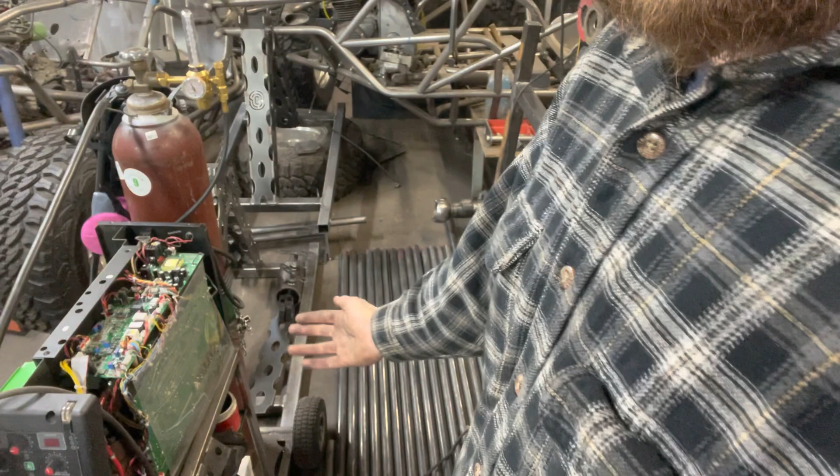But today we're gonna be also working with a broken Everlast welder. They're sending me parts. It's part of the warranty and everything. Great machine. It's put in work, but the fan took a shit. They noted it when I got it in the order that it was acting up, but is what it is. They're sending me a new one. I'll get it fixed up hopefully this week.

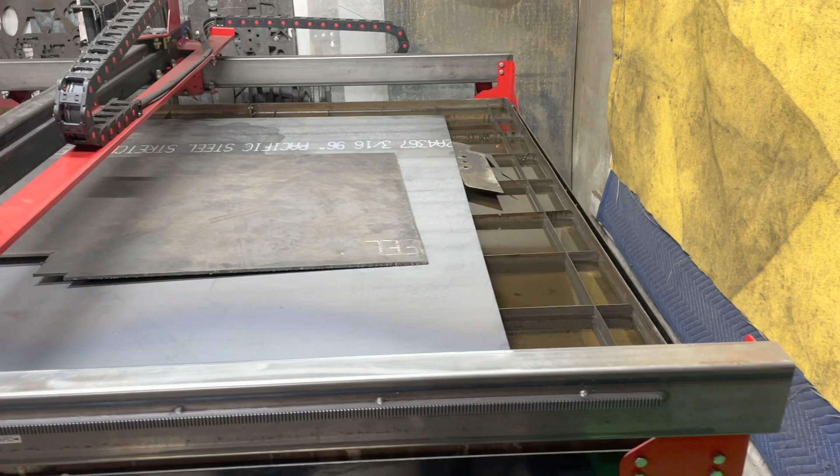We have not dialed it in anymore on this, but this is 3/4 inch, and look at that clean, nice cut. Like I said, that's our first cut. We have not cut any more 3/4 inch, but we just wanted to see if we were able to. Jibber jabber, let's show you the project that we got, this here pickup.

It is one mean looking unit. Toyota 8-inch mini axles. The 8-inch pod size. This does have an aftermarket axle. I believe it is a Diamond housing. I could be wrong. There's a lot of fabricated housings out there now. It doesn't look like it's Trail Gear, but obviously everyone, I'm sure they'll post in the comments and figure out what it is.

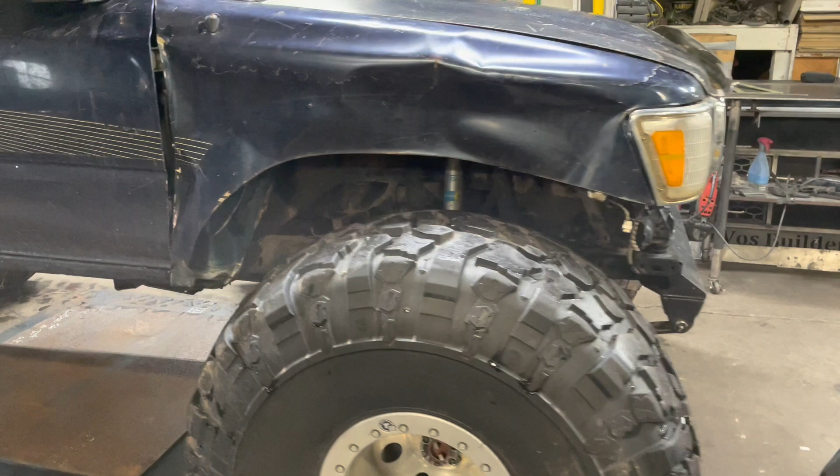But here is, this isn't exactly, but this is where the WFL Walker Fab Lab front hanger extension kit came from. Basically, we do this around our area, and I figured, since I have the capabilities, I'll make a kit for everyone else so they can move their axles farther forward and clear 42s and not have to worry. This one I didn't do. I'd prefer the axle to be a little bit farther forward with a little bit different setup of springs, but different strokes for different folks. But it's a clean rig, and let's get this build going.

So first thing that we're going to do is we're going to assess the rig and see what kind of design layout that we can roughly do on this. Some people cut their fenders too much. Some people cut their fenders not enough, or some people don't cut them at all. This one actually happens to be just about right. So now we can manipulate it the way we want it.

And I know I got a few words that I say consistently, so sorry. You're just going to have to work with me.

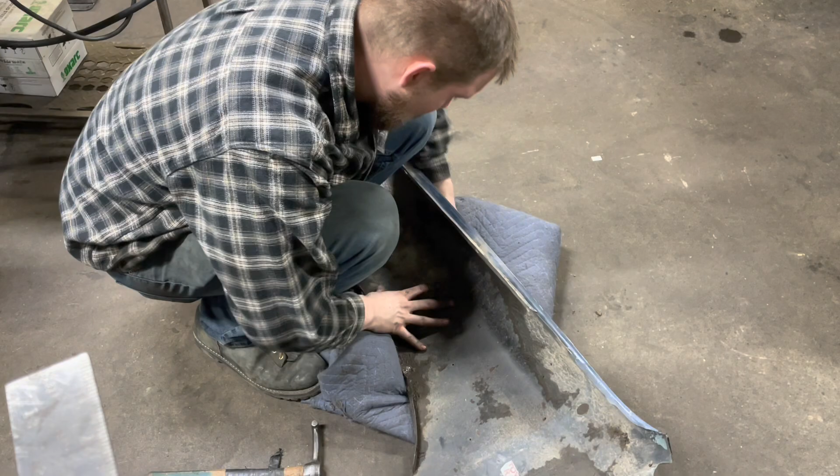But this is the rig we're working with, and I'm going to start measuring and getting some tubes bent up, and you'll watch me get those prepped. Alright, so this fender is really beat up. I'm going to try and straighten it out a little bit so it just looks a little better. I like everything just a bit better.

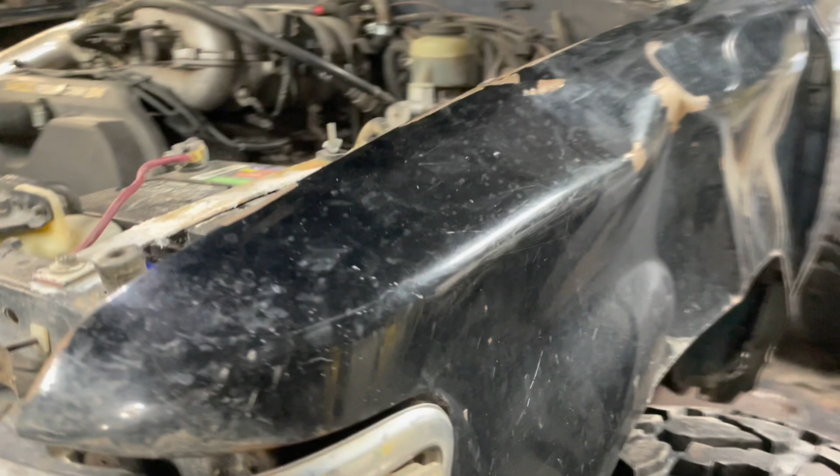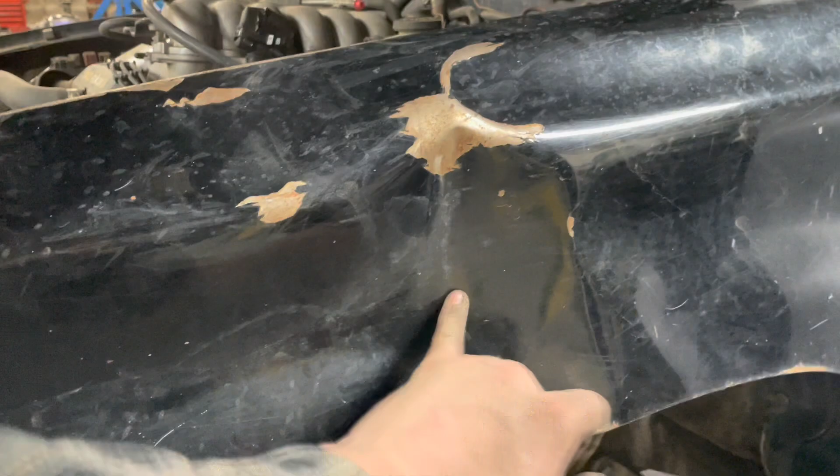Let's see what we got to work with. So, okay, so this side's a little bit more beat. So you can see this. All right, let's get this worked out first. This one, this is the main. It's almost a certain shape. And then we'll work on this one, okay? Because that looks like it'll fan out once I'm done. And then after we get this crease worked out from this one, we'll then work on this one.

I don't know if you can see that, but it's just a slight little crease. It's like it all just bulged out in a way. I don't know. We'll get it figured out and make it natural looking, but the rest of the fender's not too bad. We'll work this and fill this gap so that it looks just cleaner, because our continuous A-pillar, sorry, let me get you adjusted. Our continuous A-pillar is going to come down and then drop down.

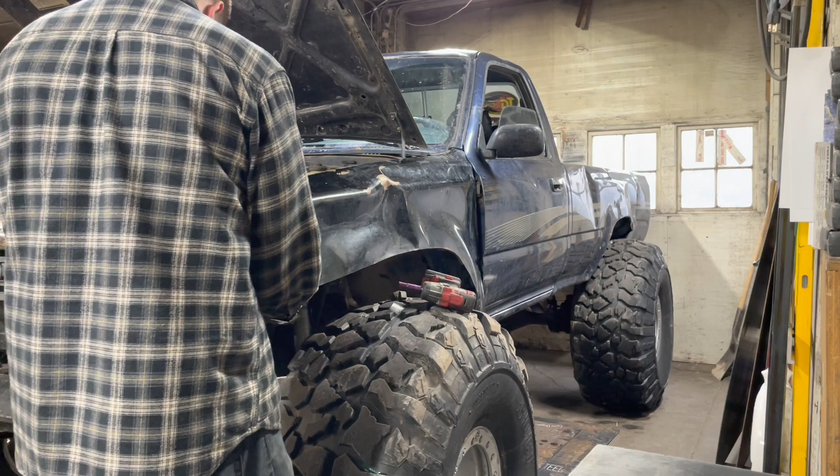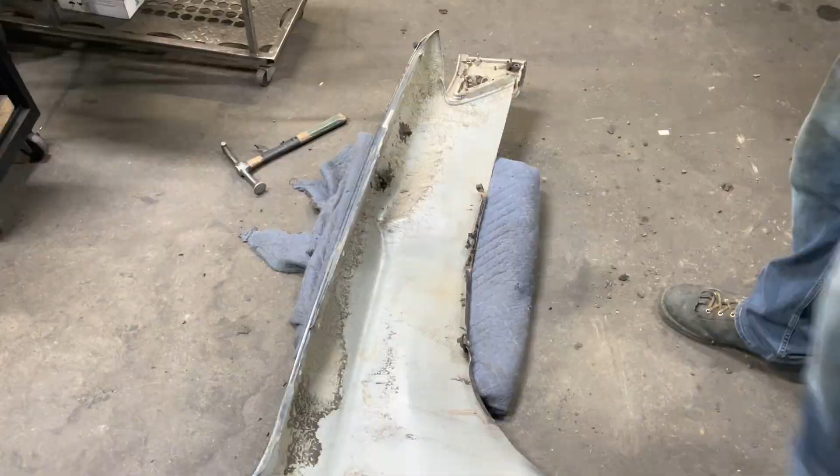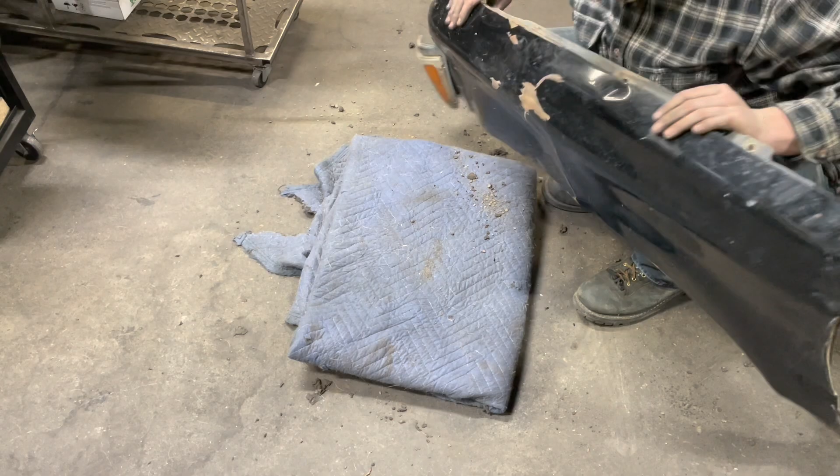We got our makeshift pad basically here, and we're going to work out this one first, then we'll do this one and then this one. So, let's get this going. There's that little piece worked out already. Paint chip and fade is going to happen on here. That's a given. Just trying to make it a little nicer. Blanket pad.

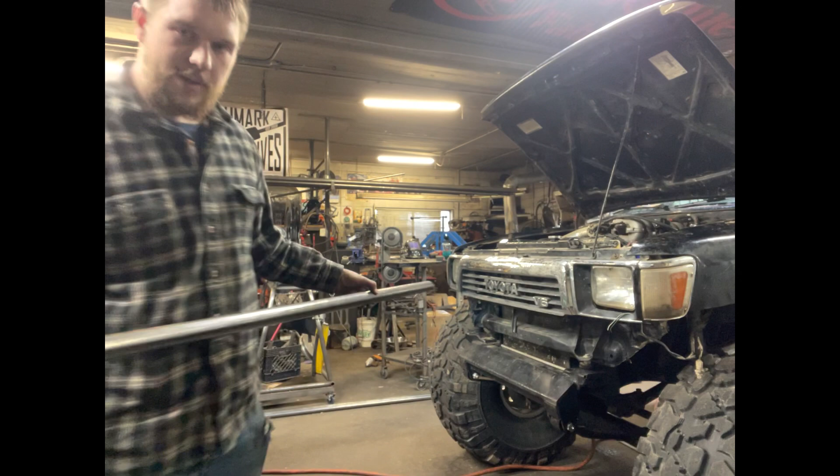All right, so we got the tubes cut. They're right here on the table, just out of sight of camera. I got these caps, all right? And I basically got it so dialed I can put the cap in, smack it in there, and it sets itself in there. Now I'm gonna TIG weld these up, okay? And you're gonna see that right now. So we're getting this cut right now.

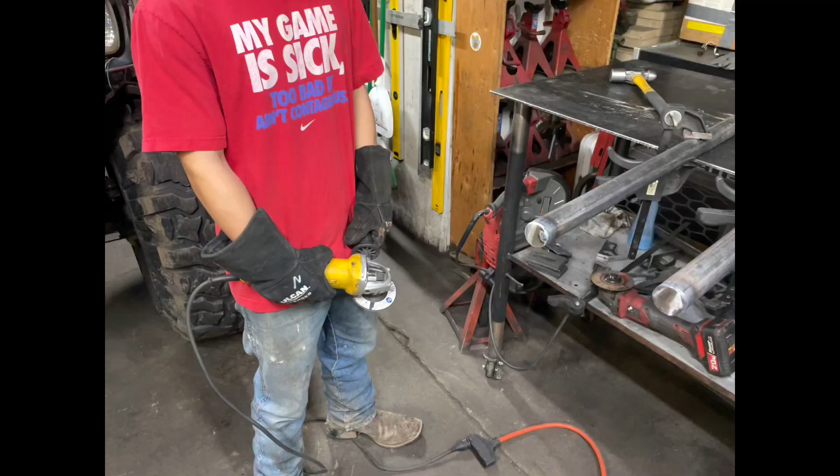So the shop hand had a question, and we had a low spot right here, and he didn't know what to do, right? He was texturing this tube, you know, stage 1 of texture. So he asked what he should do. Should he grind it more on this side? And I was like, well, that's usually option 1. So we tried it. He grinded a little bit, right?

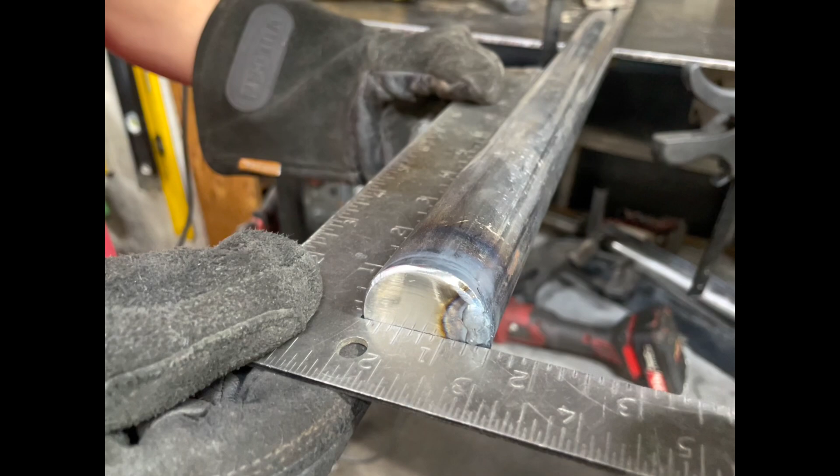And we kept checking it with a square, like he does, and it wasn't square right off the bat. Now it is square about now, but it wasn't square at the time. So I was like, all right, well, grind down to a happy medium on this side, but make sure we don't, you know, blow through and show the cap.

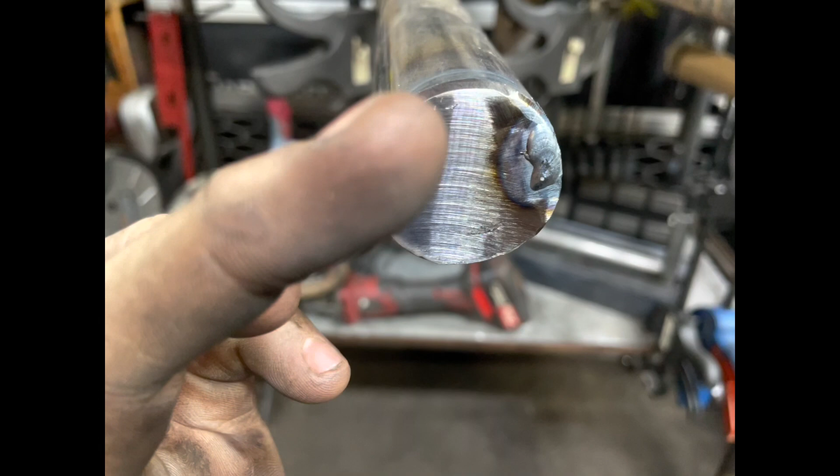So once he ground down, we cleaned it up just a little bit. Nope, it's not. It's just reflection. Ground it down a little bit, and then I TIG welded the little low spot so he can then grind down flush that little low spot on this corner.

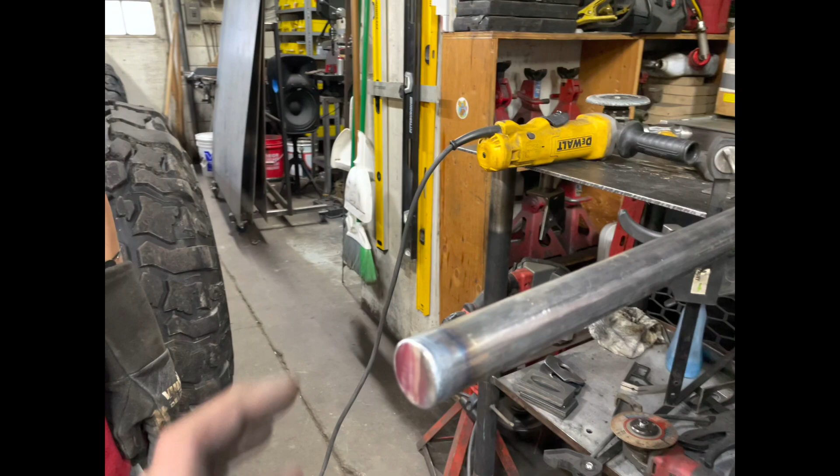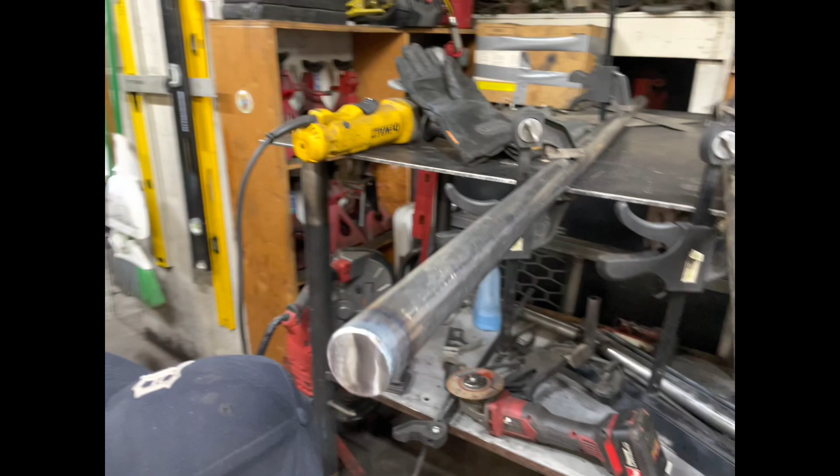So as you can see, he got it cleaned up in that little bit of time. And now this is step 1 of the process. As you can see, we got our little profile on our edge, which is, say, I don't know, a 30-degree profile, little bevel all the way around that. And now he's going to get the sander out, and we're going to sand these to shape.

Now we always start with the face, get that sanded, make it all look pretty, and then we start with the whole outside perimeter. The last part is the bevel. You always worry about the bevel last.

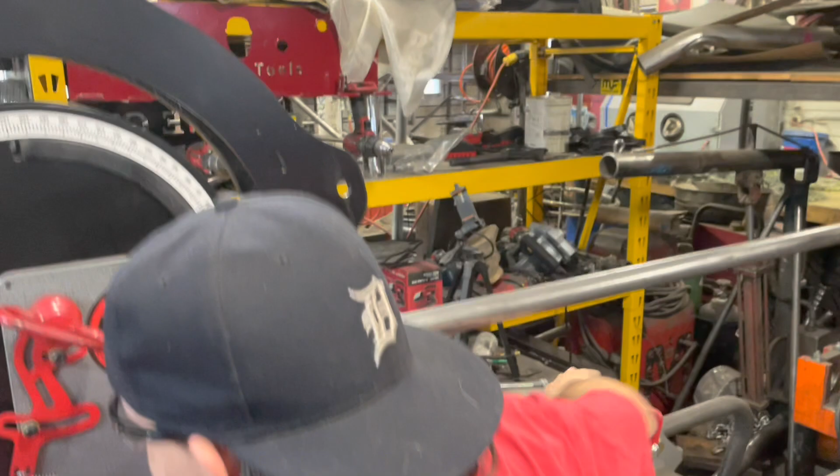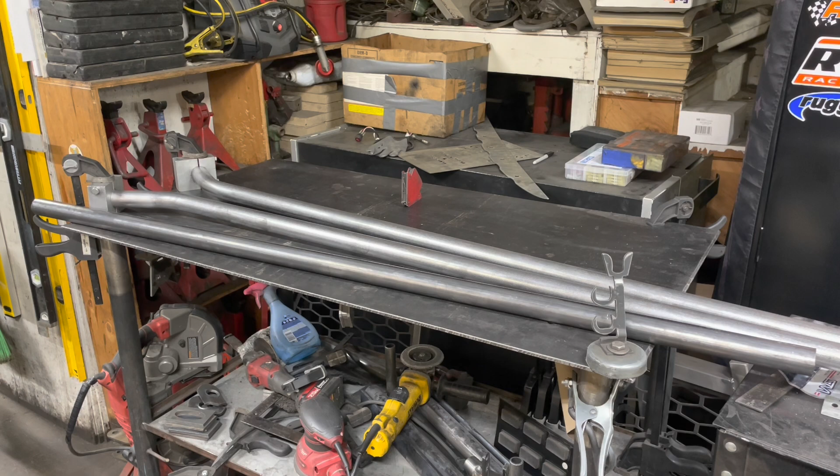And that's how you load her up. Okay, so we got our tubes for the start of our rock sliders here. I'm going to show you how we are going to do these rock sliders today. We're going to get our first clamp block in position. We'll take it over to the bender, let it bend all the way to the degree needed.

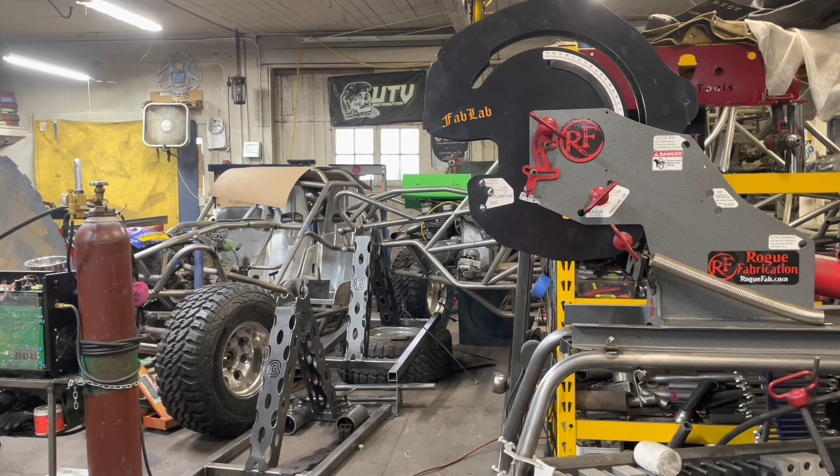To the video. Stop it. Yep. Okay, go.

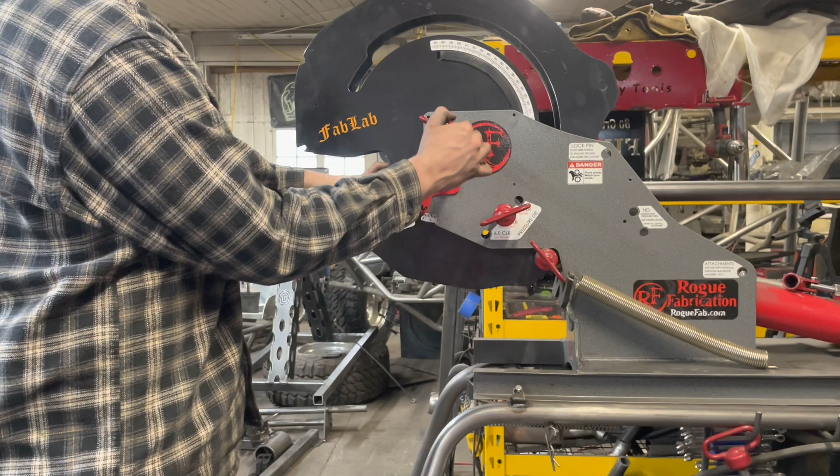So loading the Rogue Fab M600X HD, as it used to be called before they upgraded the machines, can be kind of a booger for some people. You want to find the hole that you're using your die in. So this is a 4.5-inch centerline radius die. You're going to put it in a 4.5-inch centerline radius hole.

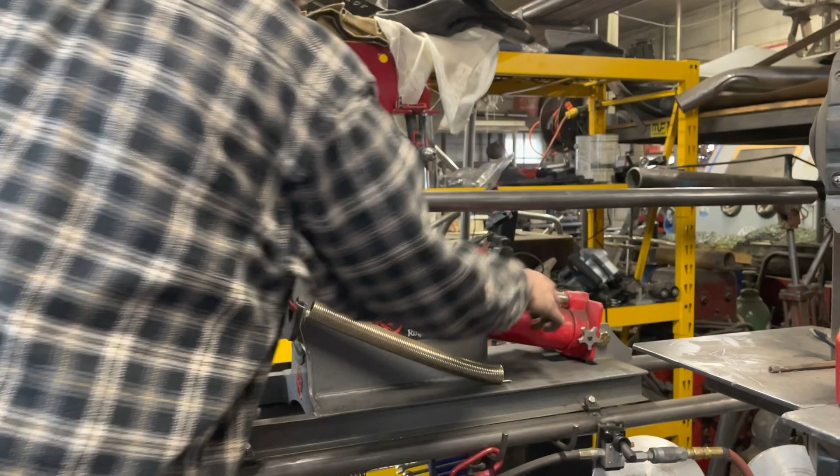Now when you do that, you'll need to pull your machine down because there will be pressure from the ram sometimes. Take your middle finger, pull the back plate, your thumb, and push the pin. Close your valve, and you pump it just barely snug. Not cranking on it with the lever, just snug. And then that is your zero. If you do that every time, you will have a consistent 0-degree mark.

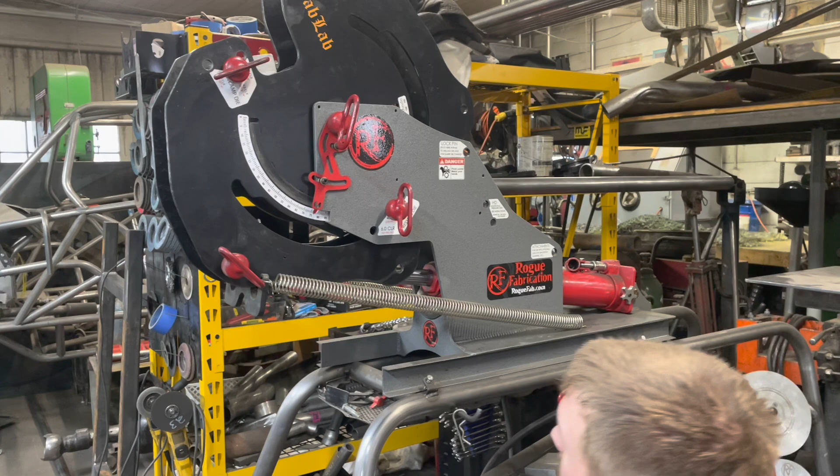So we're going to be taking this bender, and we're going to be bending this material probably about 90 degrees, and I don't know if it's going to be past 90 degrees. So let's get this bending. Go. There's your material bent.

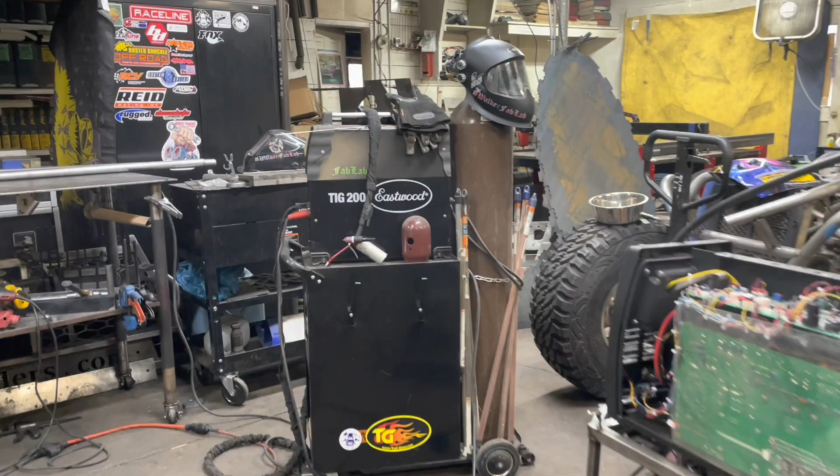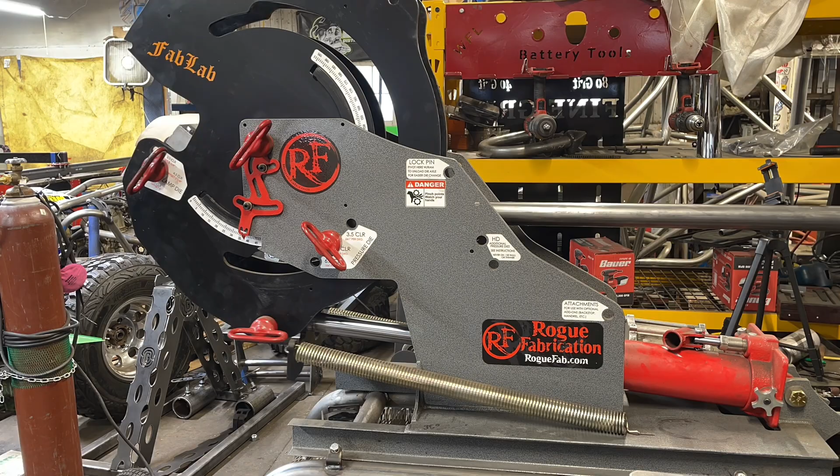Go. Now we're going to repeat steps 1 and 2. Put the clamp down, clamp it in. We're going to repeat the process like we did with the first tube. And we're going to get the bending. So we're going to get these clamps all bolted up. Go ahead and slide that on there, please. We'll bring it all the way down. Put another one on there, please.

And all this is, right there, step back real quick. All this is for is so that it'll help us make sure that our stuff is on the same plane through. We don't need it perfect, but we need it within a quarter of a degree. Now, some people may want it better. Some people may not care. But that's our spec, and we stick to it.

So as you can see, we got our clamp and our line marked. We're going to get our clamp loosely fitted up. Slowly tighten it down evenly. We're going to move it out just a little bit so we can get our wrench on it. It's still lined up perfect, right where I need it. I'm going to tighten it up nice and evenly.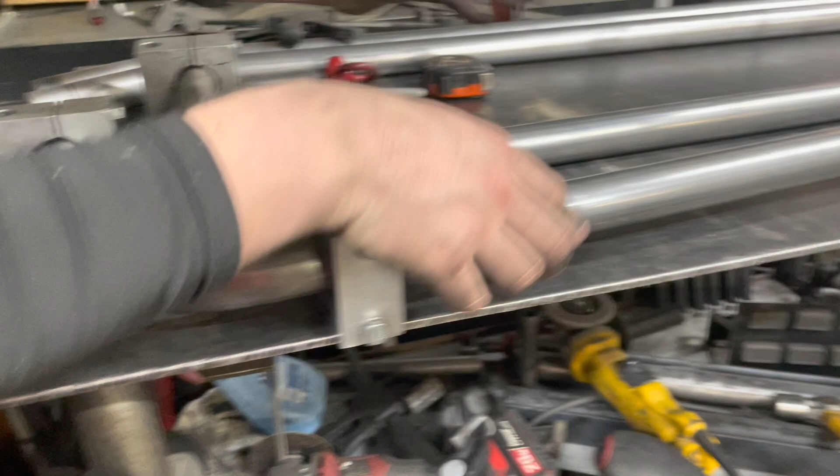And this clamp down here is just a cheater, like I said, just to keep everything in plane. Because if we didn't have this one all the way down there, that's going to happen. And then our tube is not level, as you can see.

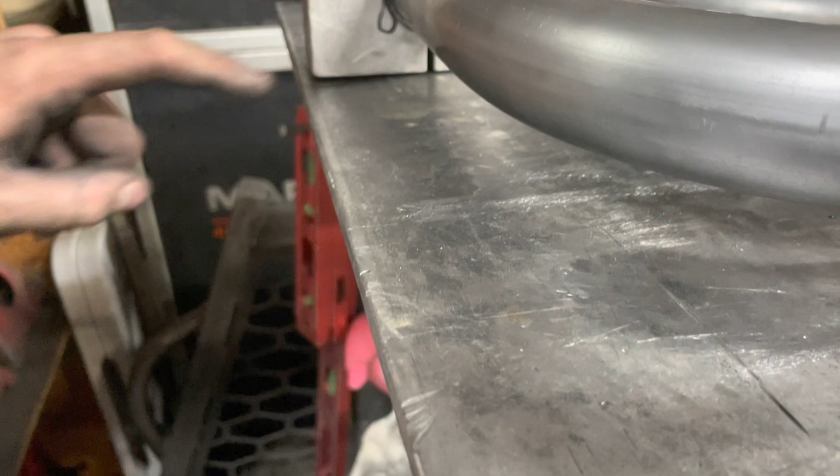So now, as you can see, we have all 3 of our clamps. This one's our helper, this one's our main bending die, and this is our previous bending die for this bend. You can see that this clamp is flush on the table, or level, plumb, whatever you want to call it, doesn't matter. It's all the same. But it's all in line and on plane. Now we're going to tighten this clamp up and you're gonna see us bend these in the Rogue Fab M600XHD.

So as we load this up for our next bend, we're gonna prepare it just like I showed you in the video. Tighten it up, zeroed, and we're ready to bend.

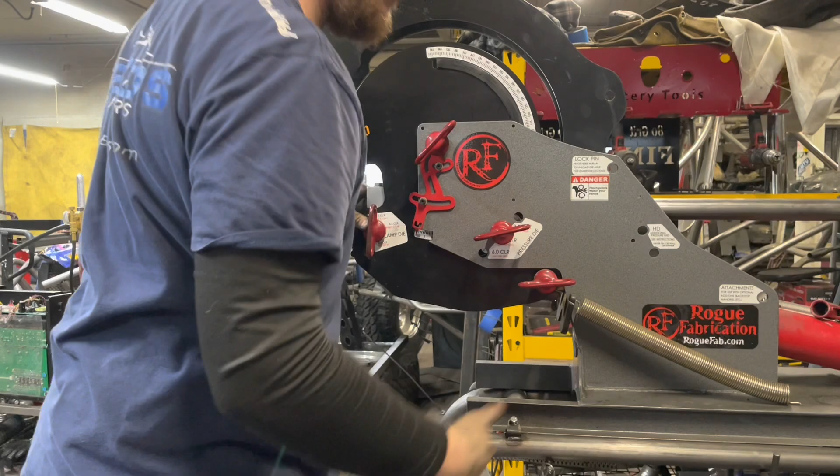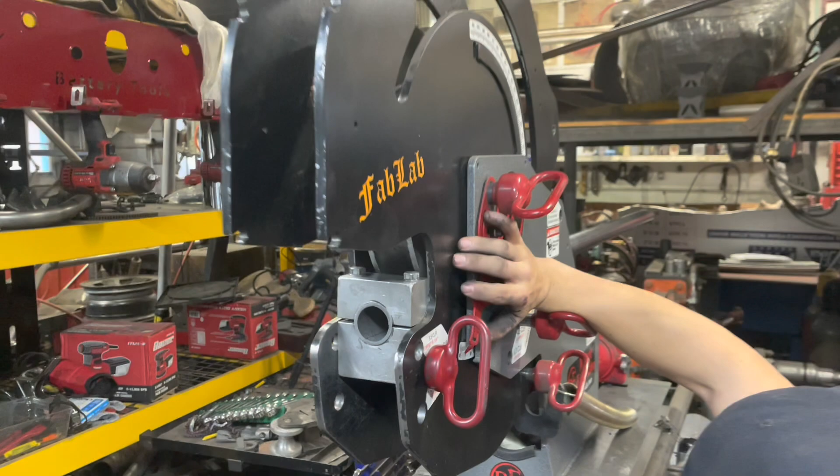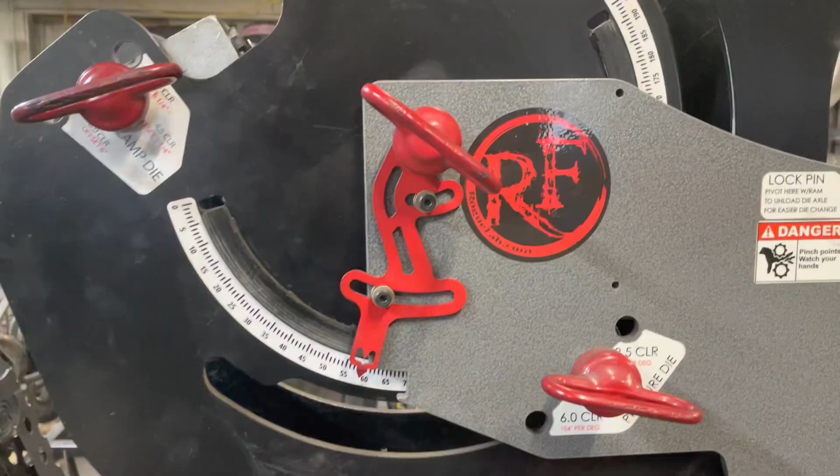So our shop hand is getting our one tube situated, zeroed out. We got to bend one at 90 degrees again, 94 degrees I mean, so we can get our sliders going. I screwed up. I forgot that the machine only has certain capabilities, so the spacing between my return bend on a very hard bend would not do it, which is fine. I'll adjust my design like I normally do to make it work. Getting this bent up. He's gonna get this at 94 degrees.

So we got our tubes cut, bent, got one done up, cleaned up, and in the configuration of what we're looking for, kind of a slider. We're gonna get this one cleaned up and you're gonna see it. First thing to do.

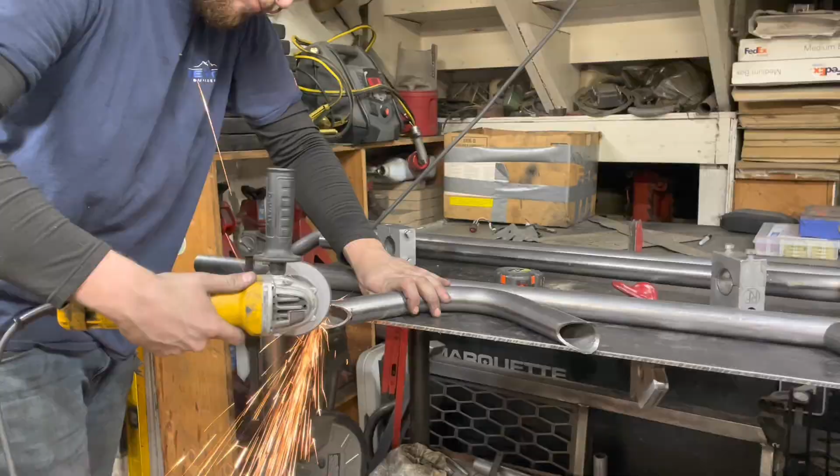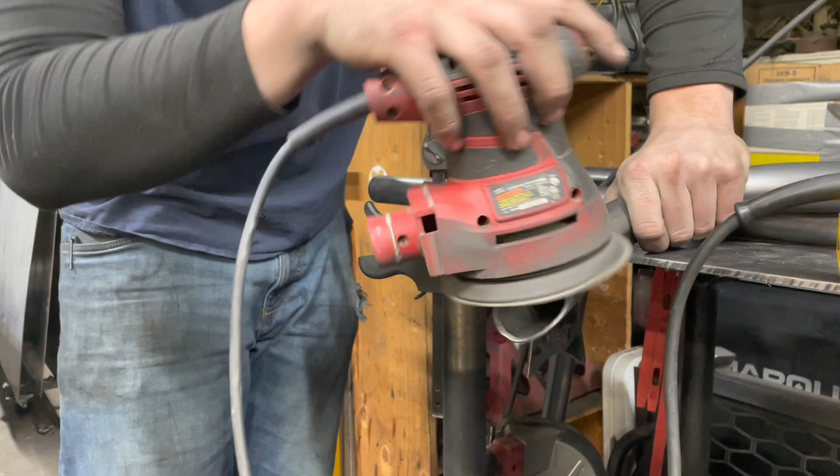Might need a new pad. Maybe. There's that too. That one's ready to go.

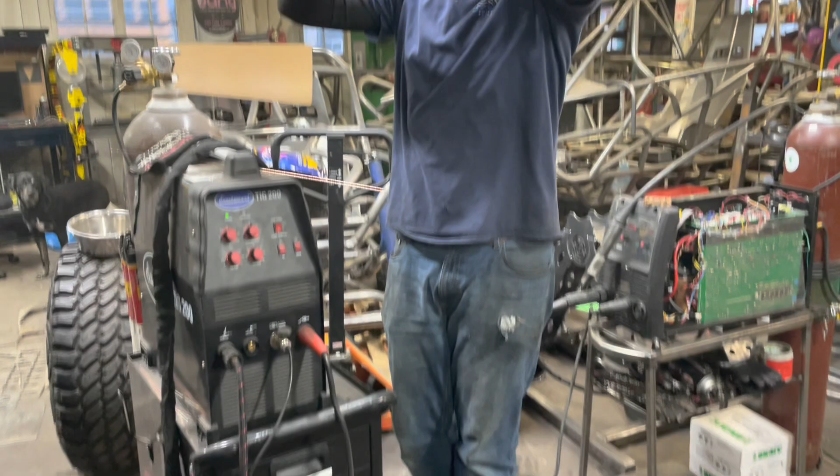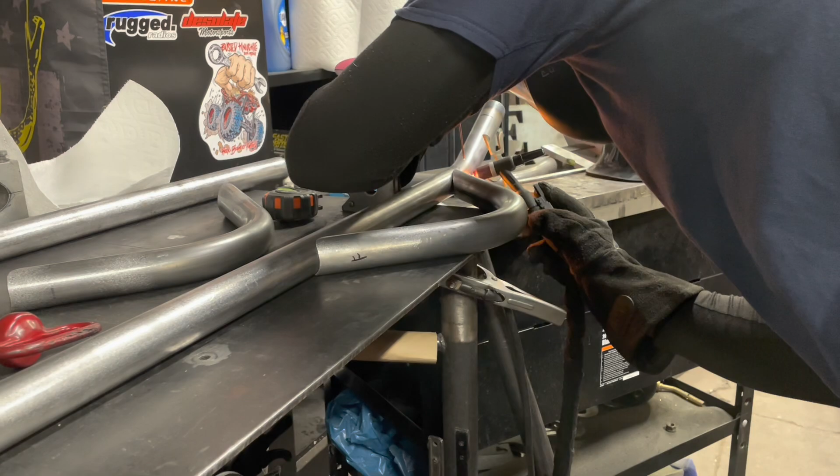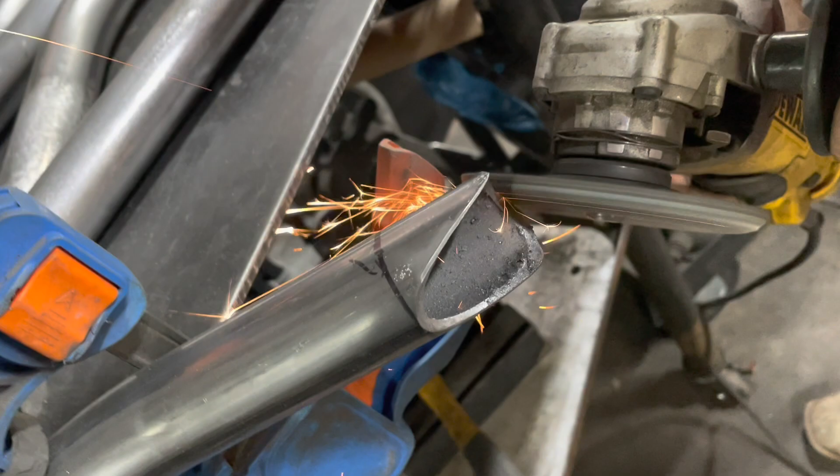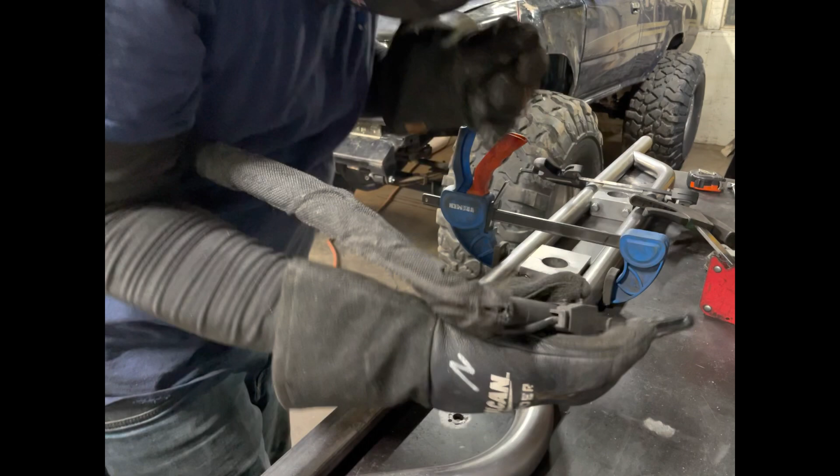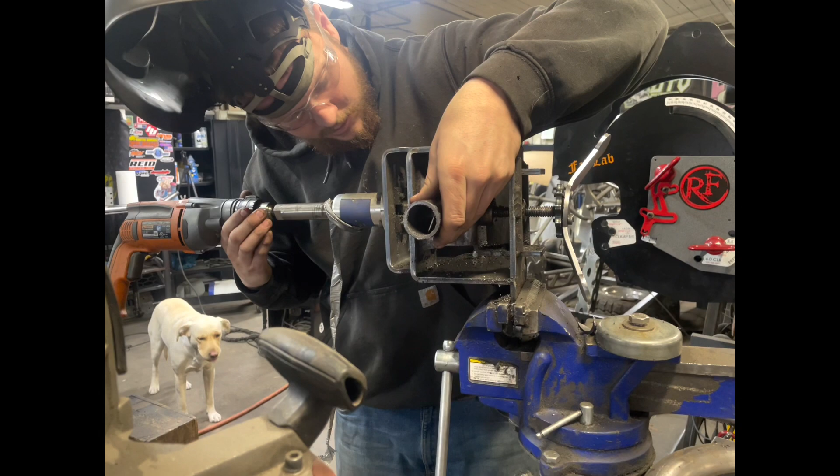We're gonna come over here. Got just a simple paper towel and some... Sorry, the camera's just a little dirty. Let's clean that up. Okay, a little better. Paper towel, Dawn dish soap and water. Clean that up, or spray that.

We'll clean up the tube, the outside. Get any residual grease, residue, yada yada from notching and everything else. The mill scale. The process of putting this tube together, there's a lot of oils on this tube. So we get it cleaned up decently and set up.

This one's kind of torched, so we'll grab one more single paper towel. Don't spray it as much because I sprayed it again before off camera. Remove this one, clean this one up.

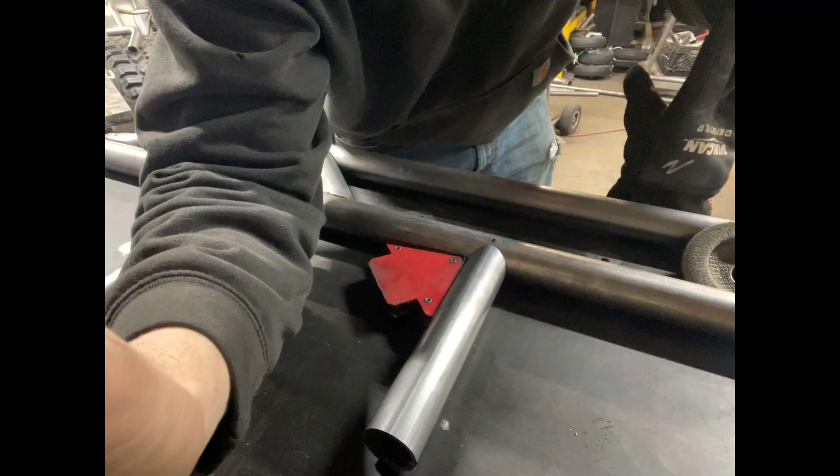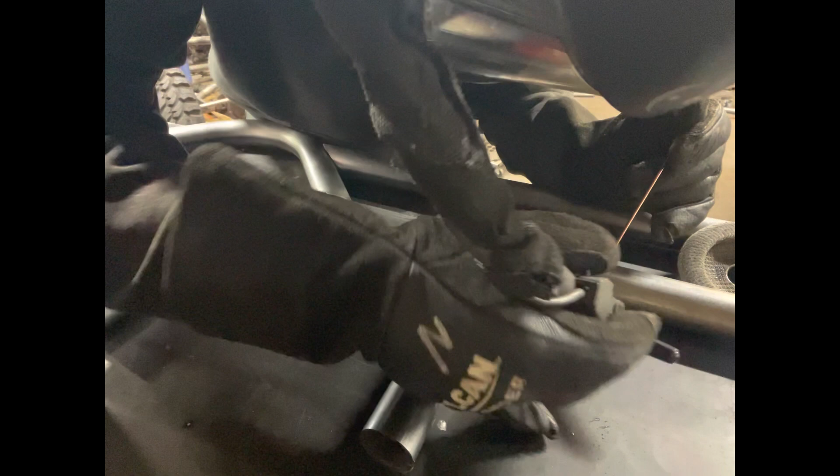So I forgot to record the first one, but I tacked the first tube. And I'll show you, this is just how I do it. I like to TIG them. Some of the tack welds are for tack welding everything together. And that way it's really nice small tack welds to burn over when I MIG weld these together.

And it's pretty. I just touched right there, but it's alright. It's a tack weld. Not passing those expensive ones.

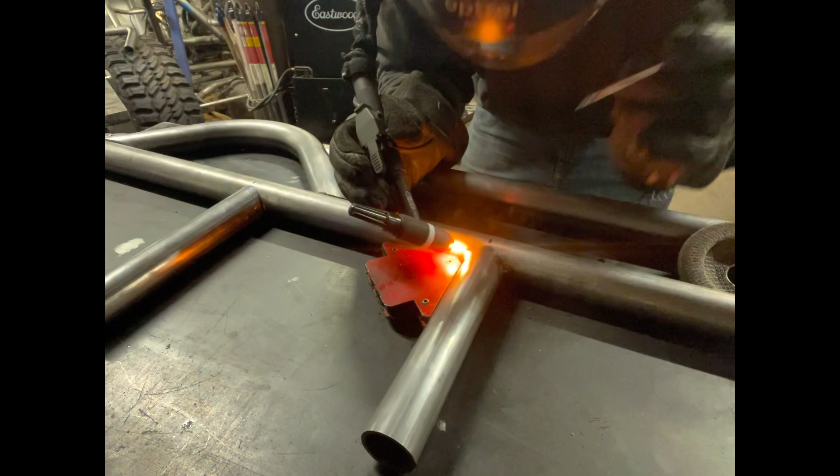Because some of you guys charge your customers that, consistently. Well, that's one thing I cannot do in our area because it is very hard to even get them to pay the correct price because everyone wants a deal. Everyone can't afford that. They don't think you're worth it.

So I got these brackets all drawn up. I forgot to do it on camera. I'm getting in the hang of this. And got them here up on my screen. I got my machine on, zeroed. I'm about to fire it up. So you're gonna see those parts get cut.

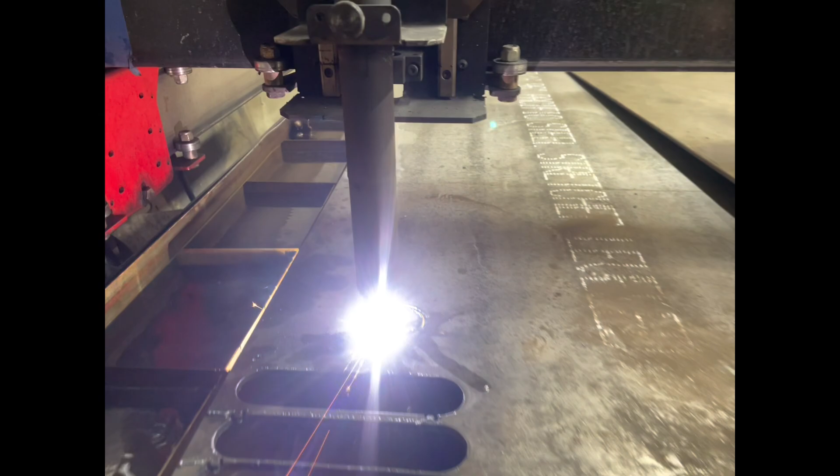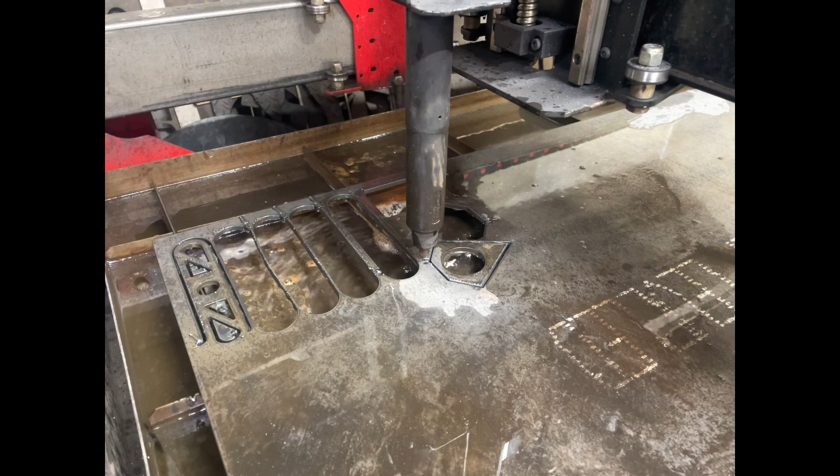So we hit cycle start. Cut out. Relatively very easy parts, so nothing fancy to see. But we get it done. We need, and now we're gonna go get them cleaned up.

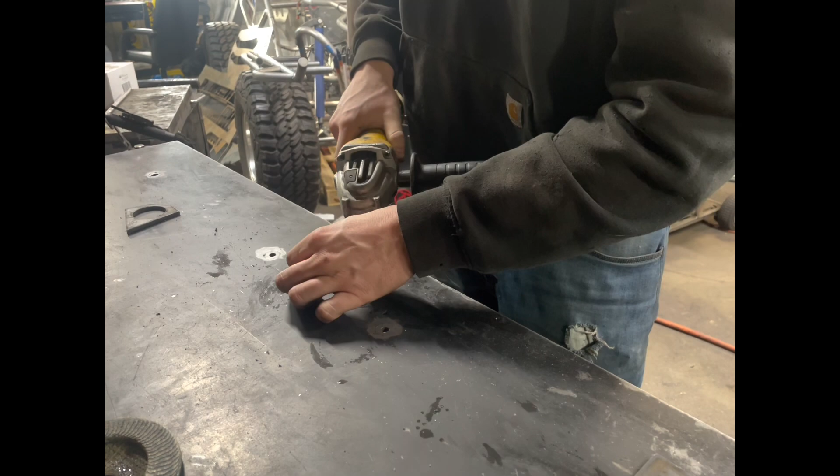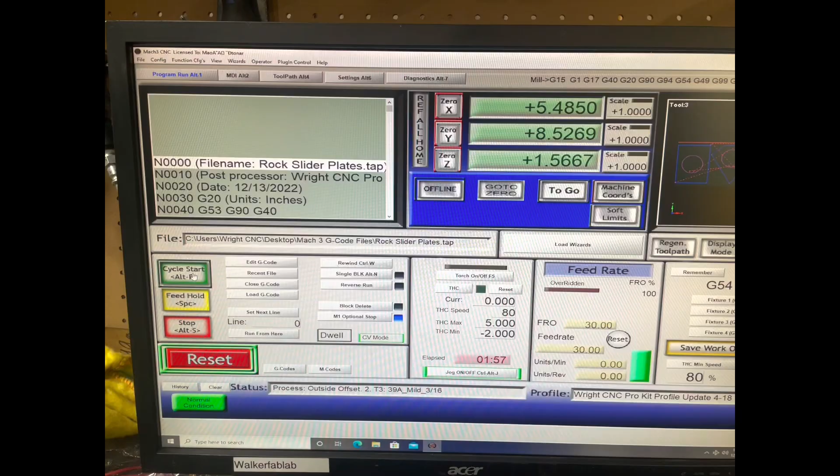So we're here at the computer. We're just gonna exit out of this. Okay, we're gonna go to our Inkscape. We'll open that. Delete this. And what we'll do is we'll go duplicate, and literally just make more, with that much spacing. And we need 6 of them.

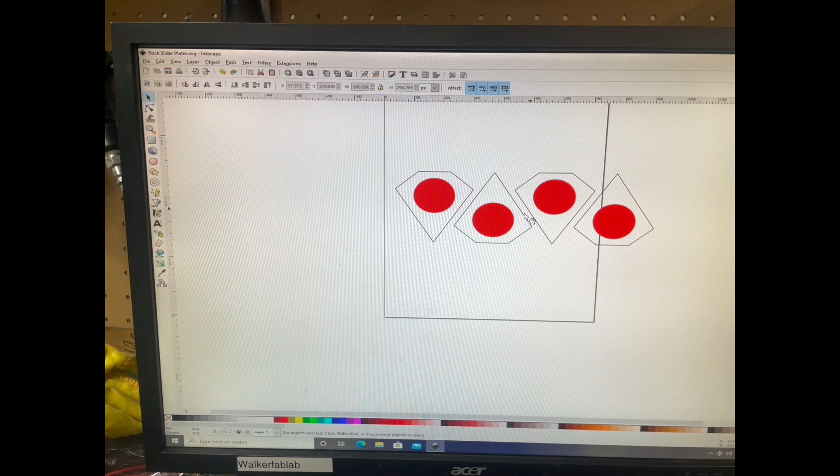I should just stack them like this, because it makes more sense on my sheet. Okay, file, save, exit. Gotta go back to SheetCam because we have to convert it to a file that it'll understand.

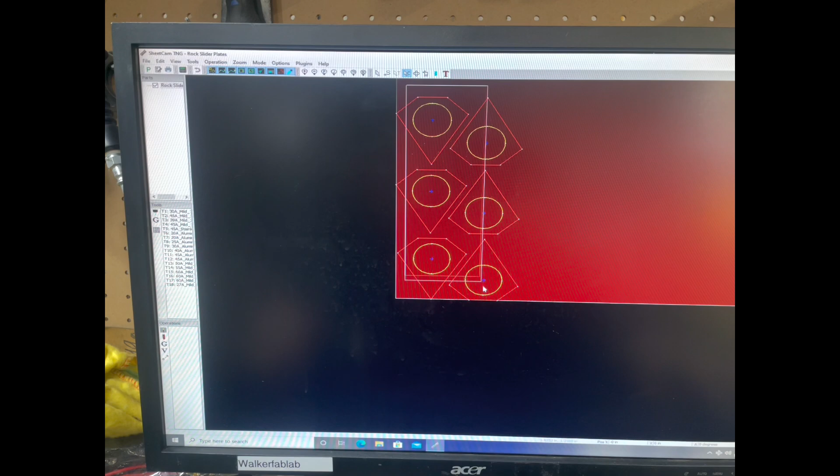And we're gonna click all those. Move to layer, new layer 2. Like this, inside offset 0, 3/16 arc, and 30 inches per minute. And we're gonna make another layer, outside offset 2, and then there's our outside path and final part. So then we're saving job, save, yes, post process, done, that's done. Now we're gonna go here.

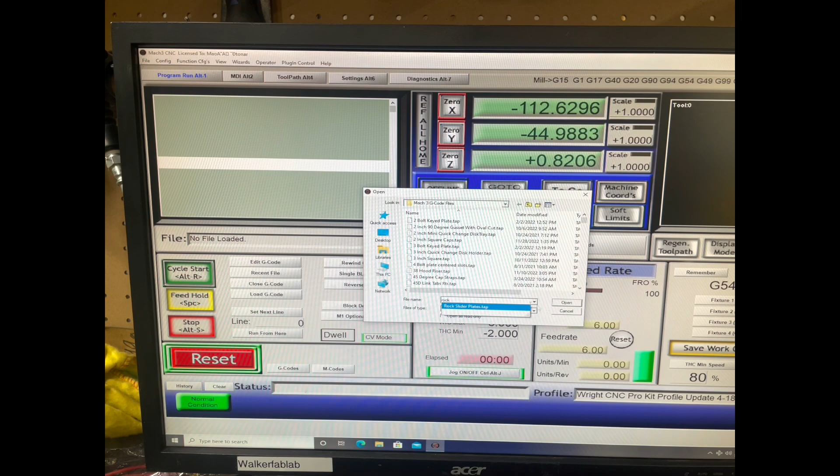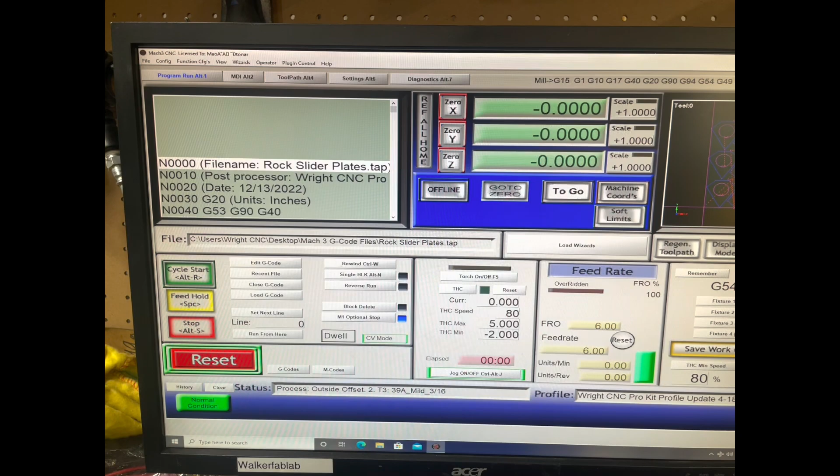And we will find rock slider plates. Okay. And we're gonna zero everything automatically. Regenerate. Make sure we have our correct parts up here, which we do. And now I'm actually gonna zero our machine over here off camera. Yep. And we're gonna zero it, regenerate tool path, and it's ready to rock.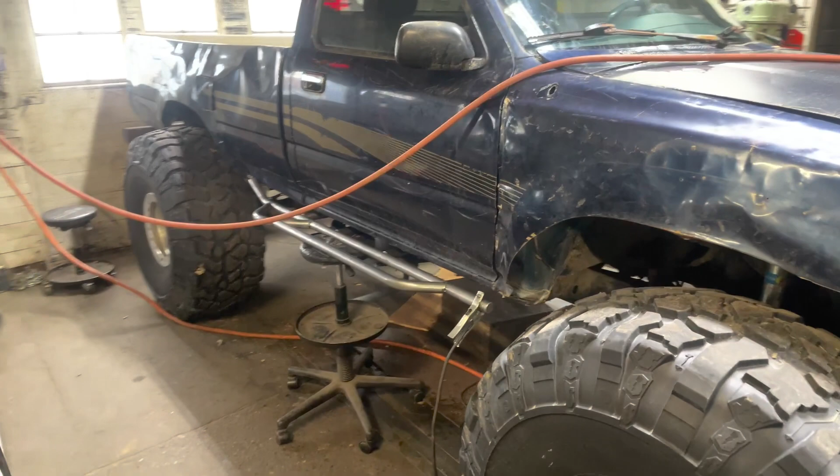And then right in here, I think about putting a traction type plate as well. We got 3 tubes right in here right now, plated, all 3. We'll do a 4th one right here, and then when we connect down, we'll also do probably a 5th, but we'll see how that all goes and lays out. We're gonna start bending up our tubes for our continuous A-pillar.

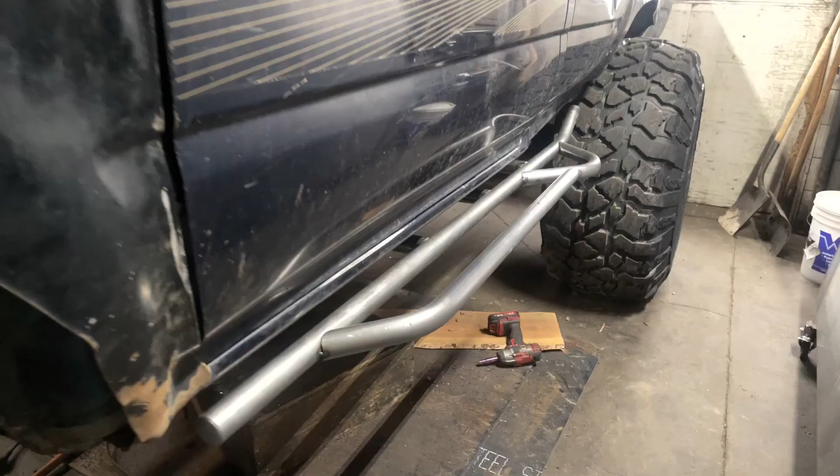So we got both mocked up, tack welded up with plates. We'll add more legs as we build, but this is a good start. We got both sides, like I was saying. Looks pretty good.